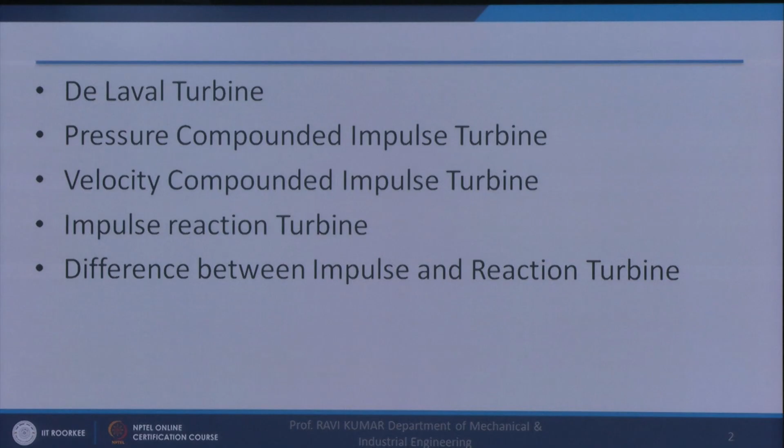So first of all, we will discuss the single stage De Laval turbine. This is a single stage turbine. So there is a shaft in this turbine, and on this shaft the blades are fixed.

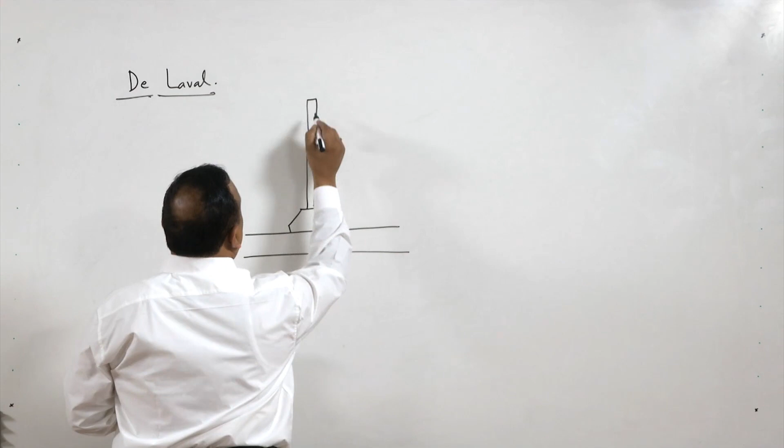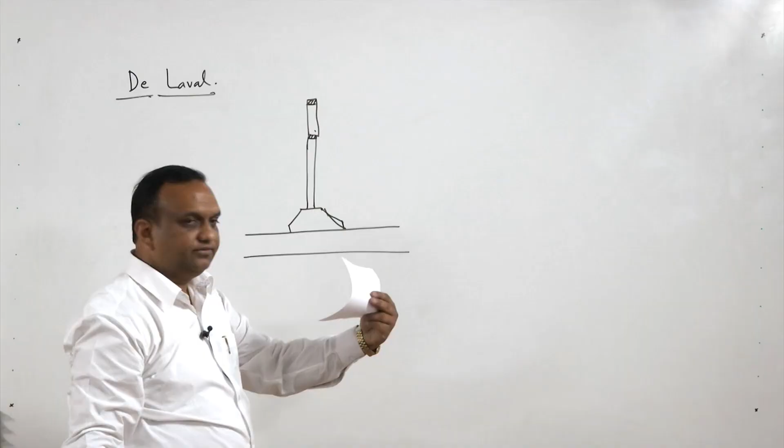So there is only one row of the blades. It is going to be like this, and this appears to be rectangle, but it is a curved plate or a curved blade like this. So when we take the elevation of this, it will appear to be a flat plate, right?

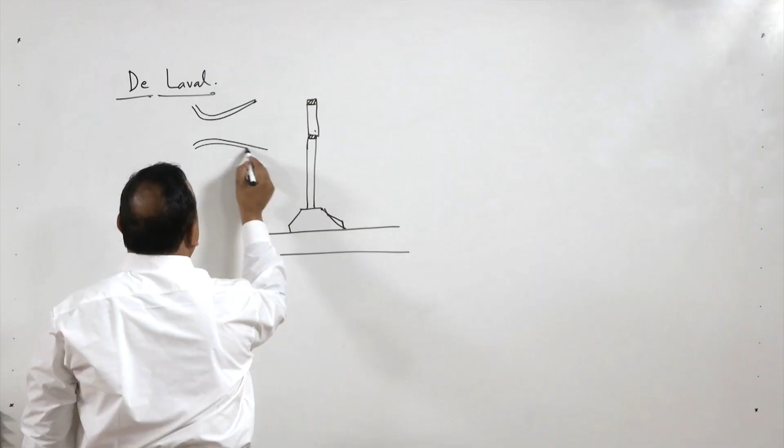And preceding the blade, there is a nozzle. Normally, it is a converging diverging nozzle. Now this nozzle sends steam to the blade. So this is a nozzle, converging diverging nozzle, right?

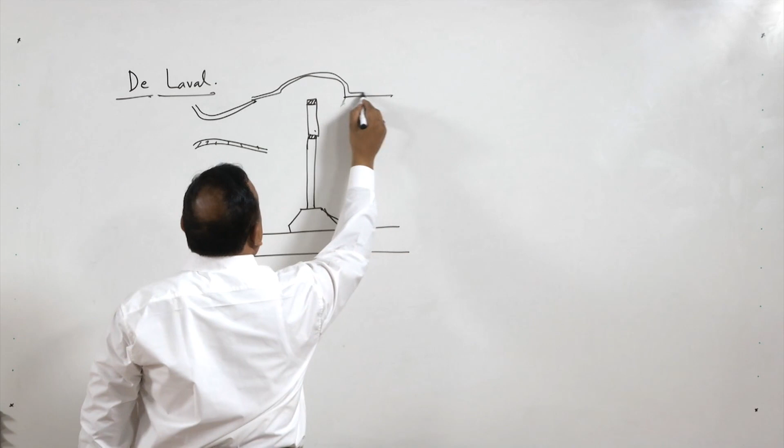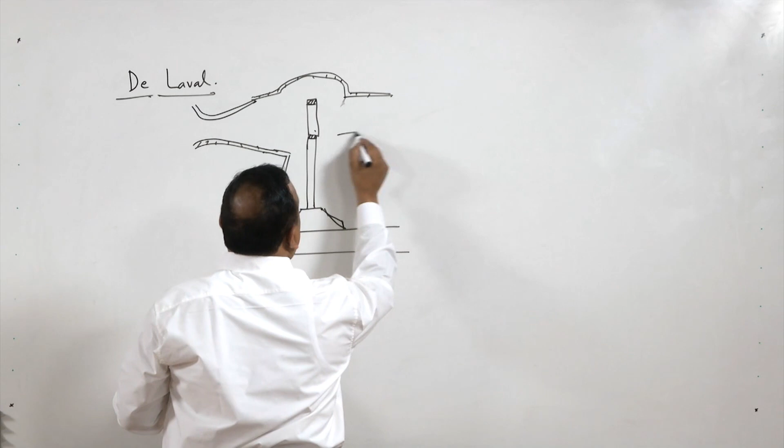And let us house this, and this is exhaust. And from this side also it is closed. This side also it is closed.

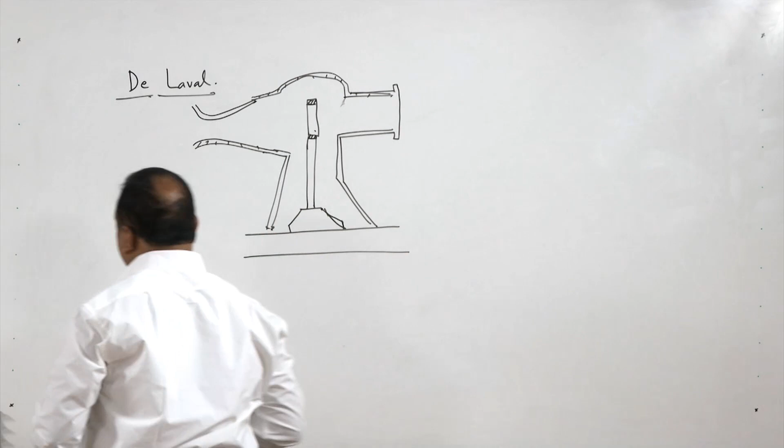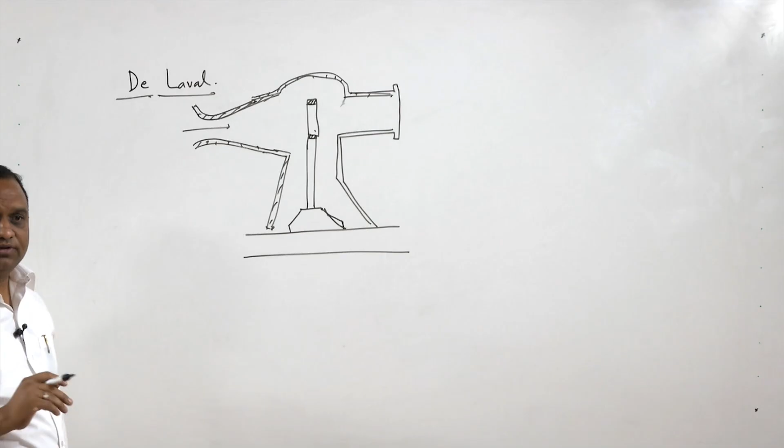Now this is converging diverging nozzle. As we know, in a converging diverging nozzle, the velocity of steam coming out is quite large, and normally it exceeds 1000 meter per second, and normally in De Laval type of turbine it is 1100 meters per second, right?

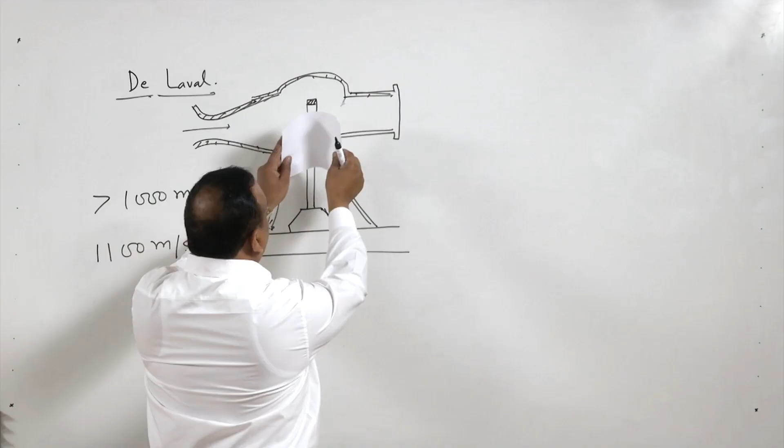And this steam glides over the blade, and the blade, if the shaft is along the board, is like this, and when it glides over the blade, it exerts force on the blade, and a tangential force is exerted on the shaft with the result rotational motion, because there are number of blades.

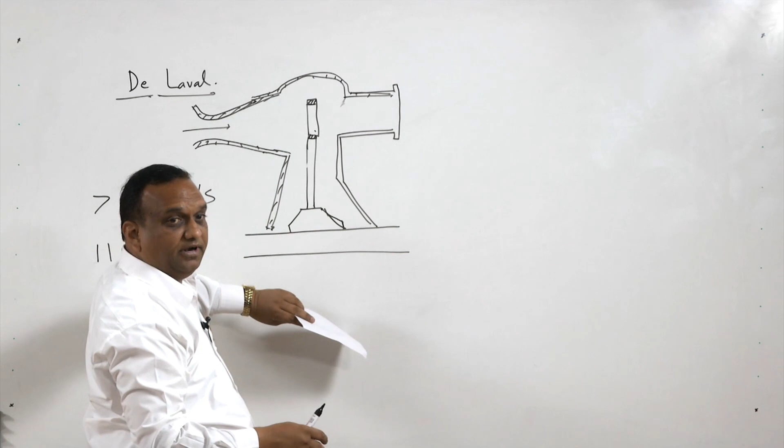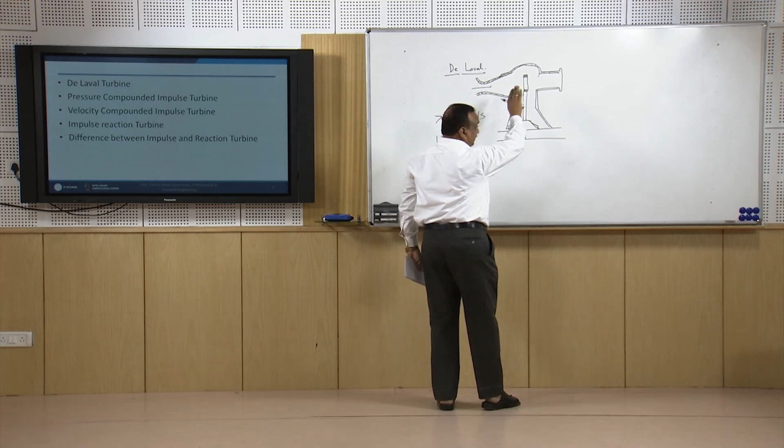There is series of blades circumferentially and axially. But this is a single stage turbine, so there is only one row of blades. Circumferentially there are number of blades, but axially there is only one row of blade in De Laval turbine.

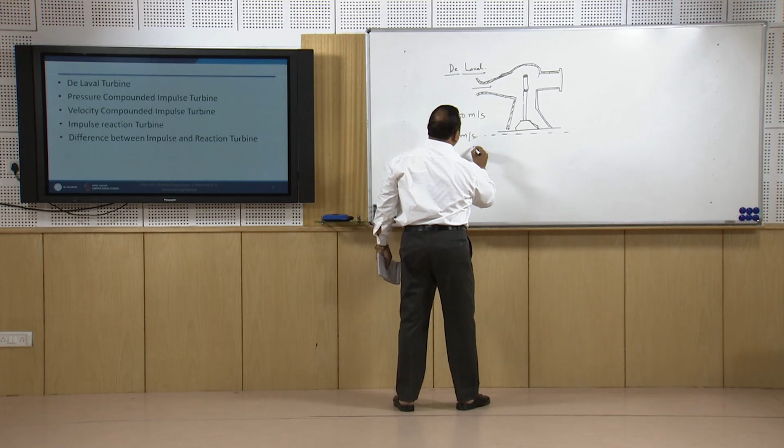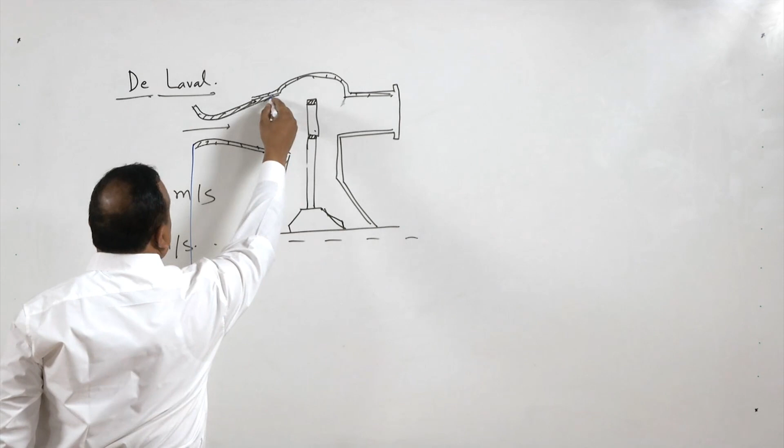And if you look at the variation of velocity and pressure in this turbine, let us make this half shaft, pressure and velocity variation. We'll draw this is nozzle, blades.

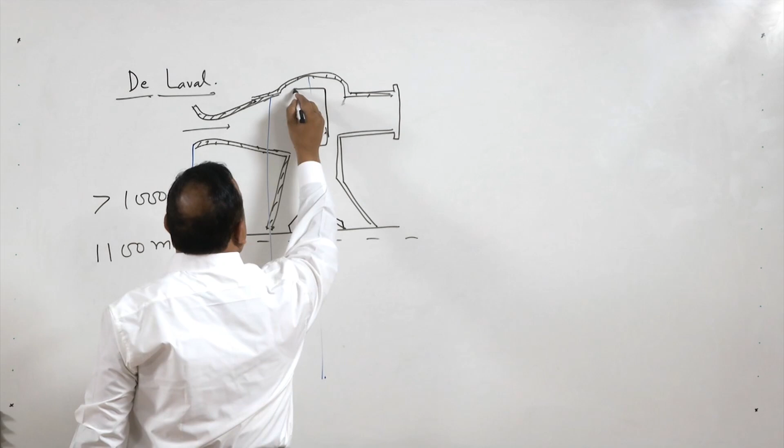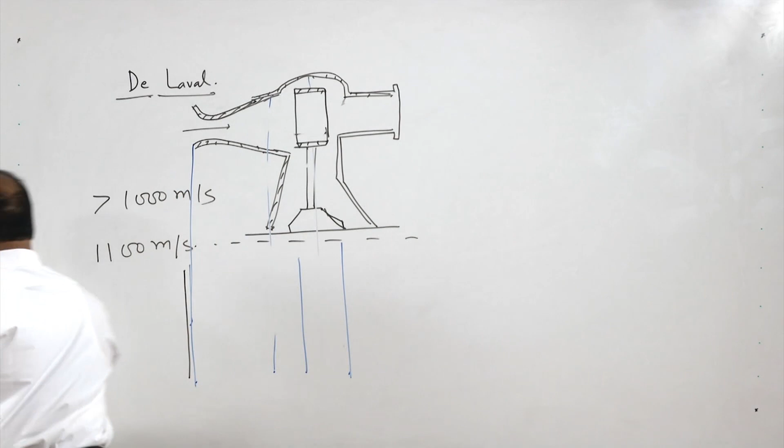And there is a recess between nozzles and the blades. This is the line, this is the gap for nozzle and this is for blade. So if you look at the variation of pressure, there is a variation in the pressure in the nozzle right from the entry to the exit, from entry to exit there is a pressure drop in the nozzle.

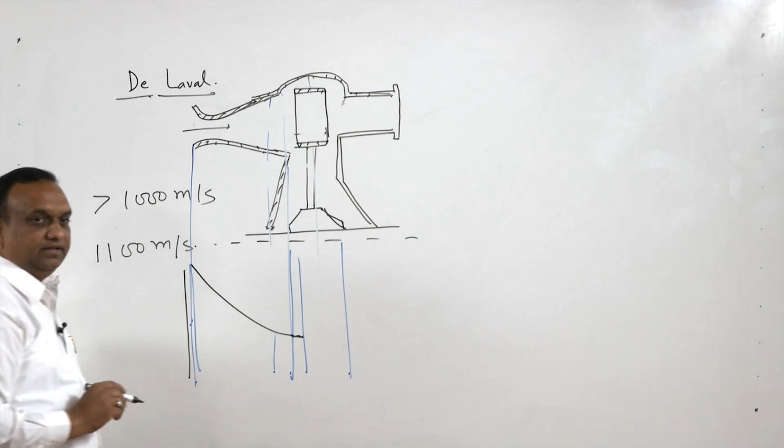In these we do not consider any pressure or velocity loss, so it goes on like this. And what about pressure loss in the impulse turbine blade? Pressure loss in the impulse turbine blade is 0, there is no pressure drop in impulse turbine blade, so it is also going to be straight.

And this is going to be the condenser pressure. This pressure is condenser pressure.

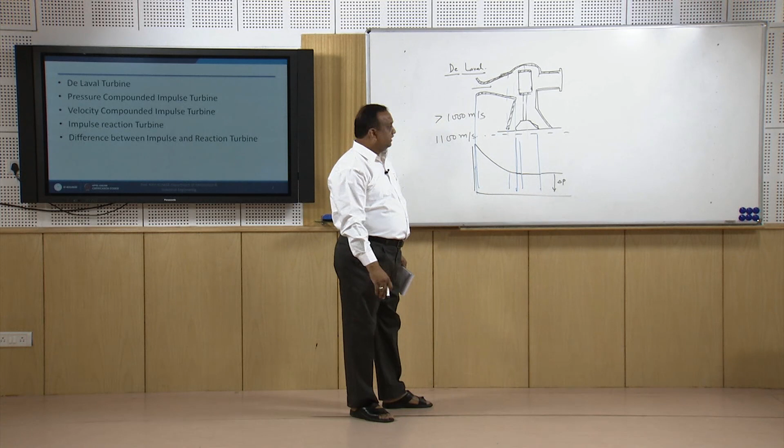Now regarding the velocity inside the turbine, the velocity also increases here, it increases in nozzle, velocity of steam, because nozzles are basically used to convert pressure energy into the kinetic energy. So velocity increases in the gap between the blade, because there is small gap between the nozzle and the blades, so it remains constant here, and in the blades the velocity keeps on reducing.

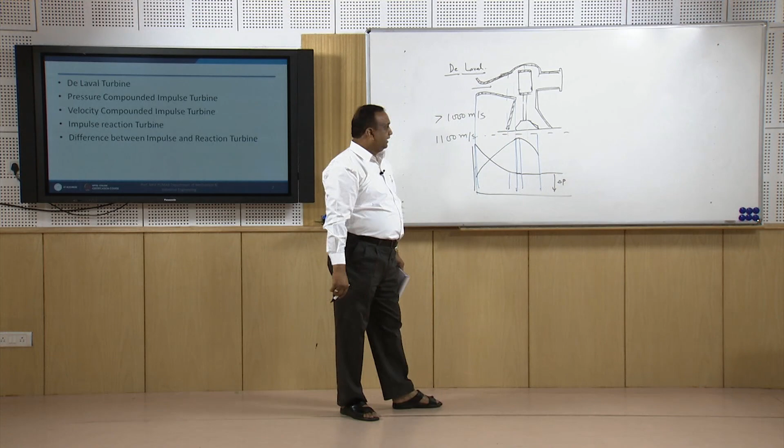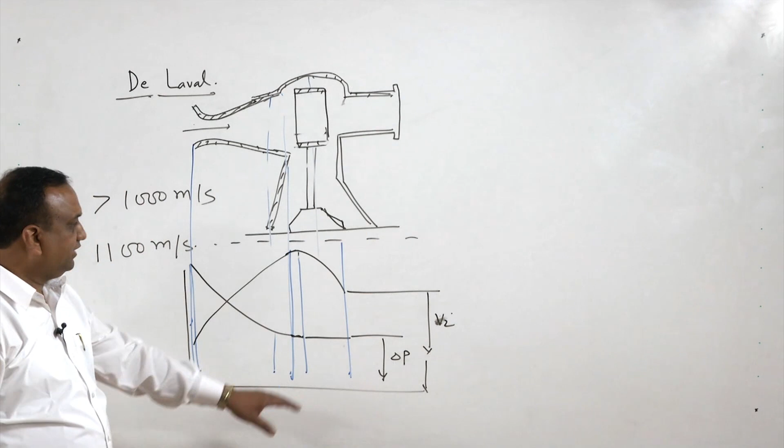And here exhaust takes place. This is almost this is V2, and in fact a lot of energy is going out with this velocity of steam. It is approximately 10 to 12%. That is the kinetic energy which is going out of this steam first of all.

So this is the wastage of energy. So it should be trapped in order to improve the efficiency of the turbine.

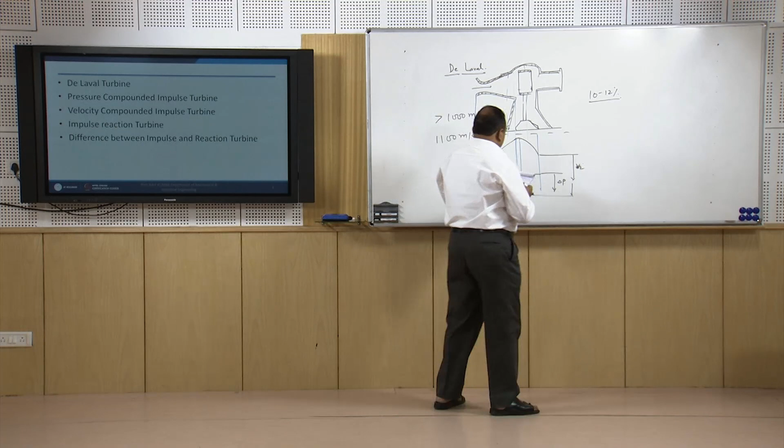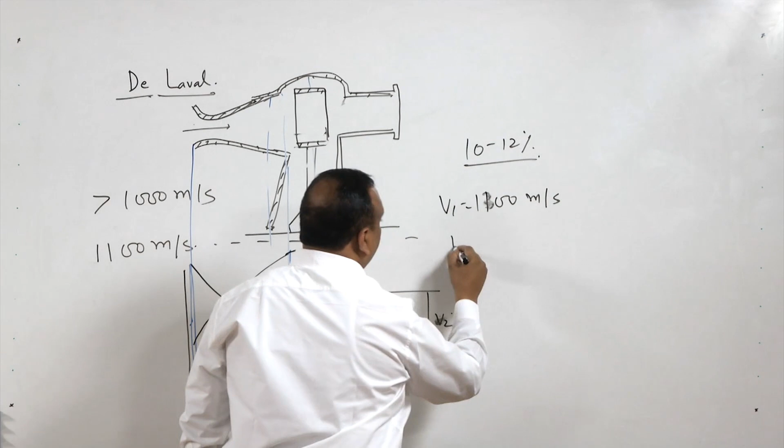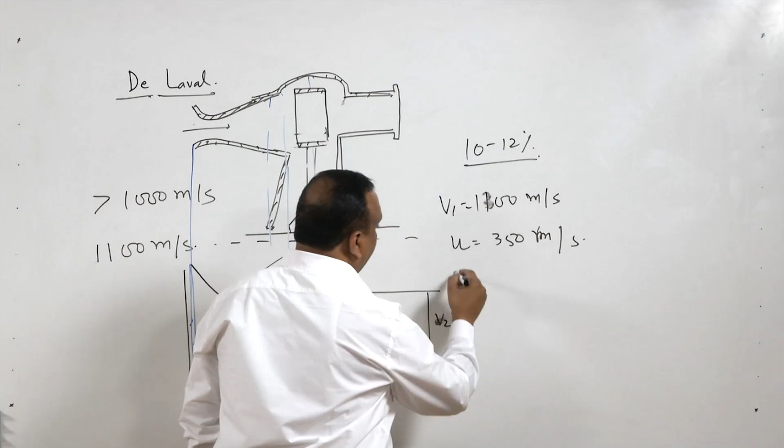Its inlet velocity is approximately 1100 meter per second, as I stated earlier also. The velocity U, the rotational velocity of a rotor, is approximately 350 meters per second, and N RPM is 3000, 30,000 RPM. So in De Laval turbine, single stage turbine, the RPM is 30,000.

RPM is 30,000. Inlet velocity is 1100 meters per second, and approximately 10 to 12% of the kinetic energy is going out with the exhaust. So these are the main drawbacks of this single stage De Laval turbine.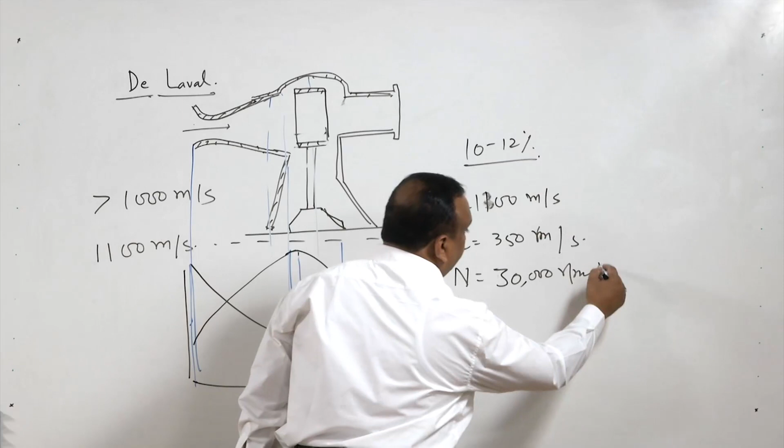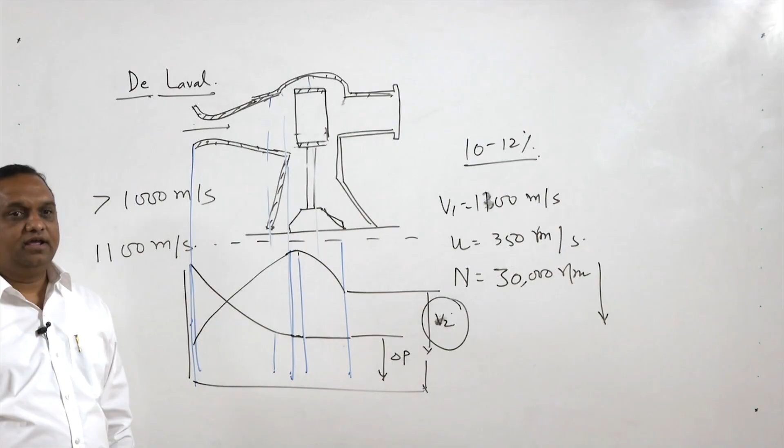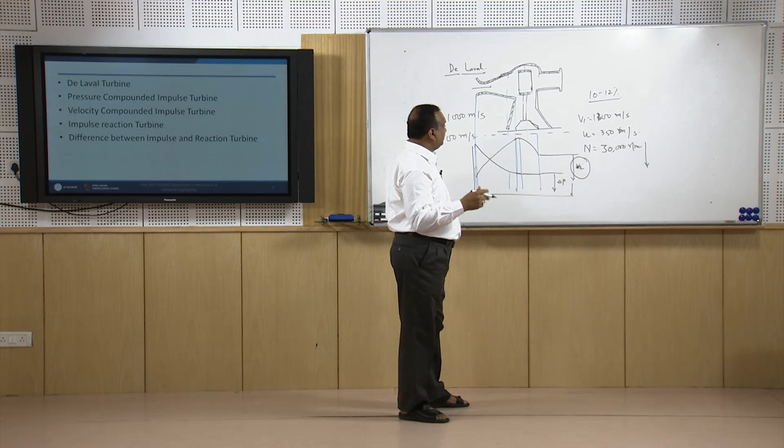Now in order to improve the working of this turbine, first of all we have to reduce the RPM to an acceptable value. Second, the losses due to the kinetic energy of steam leaving the turbine have to be minimized. For this purpose, compounding of the turbine is done. This turbine is used for smaller power generation, but through compounding we can reduce the RPM and we can reduce these losses also.

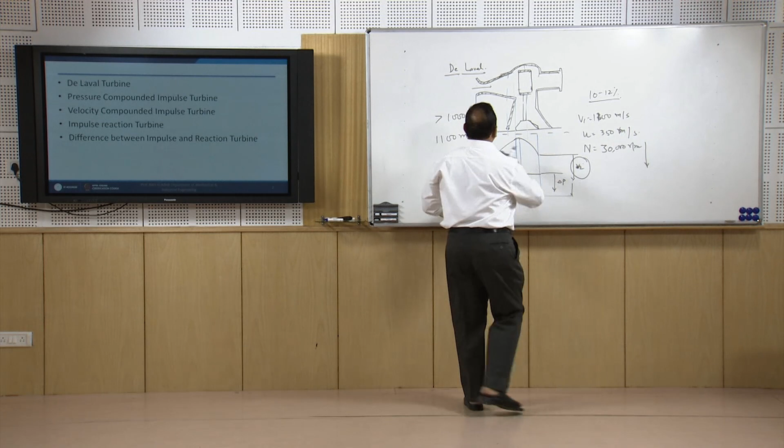So for the purpose of compounding, we will draw another diagram, and this compounded impulse turbine is also known as Rateau turbine.

In this turbine, the pressure drop does not take place in a single nozzle. There is a set, a combination of blades and nozzles. So one stage consists of one set of nozzles and blades, right. De Laval turbine was a single stage turbine.

So in the Rateau turbine there are a number of stages. If we depict them pictorially, the turbine is going to look like this.

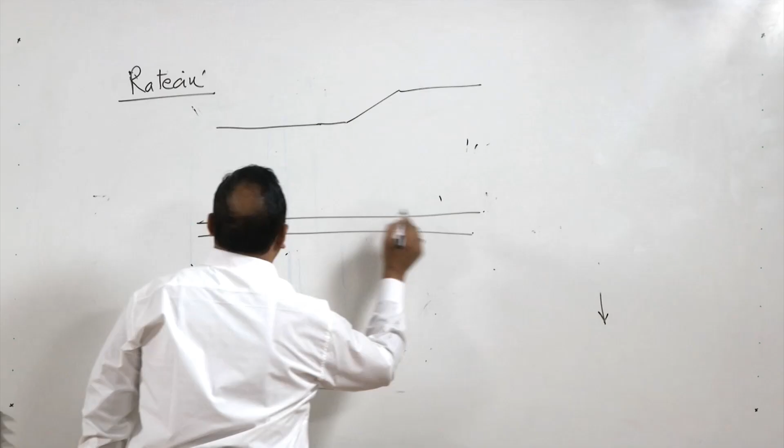There is a shaft. On the shaft there are blades. First of all we will depict the blades. There are blades, and there are nozzles.

And here also there are nozzles, another nozzle. Similarly, we can have n number of stages. Each stage will consist of a set of nozzles. There can be n number of nozzles circumferentially, but actually there is only one grid of nozzles and one grid of turbine blades. Similarly, we can have a number of stages.

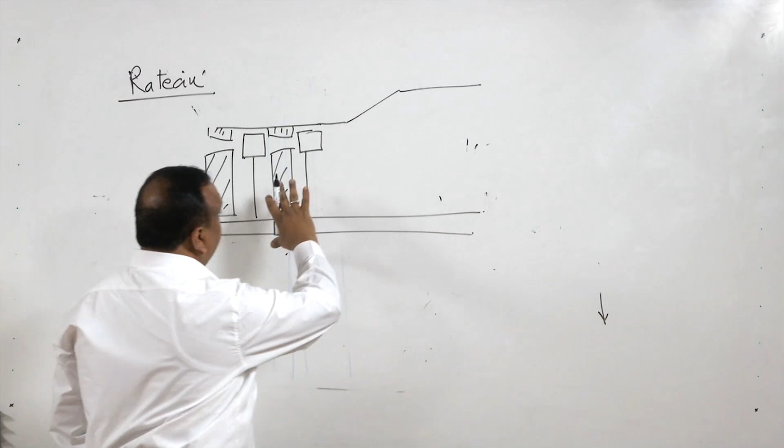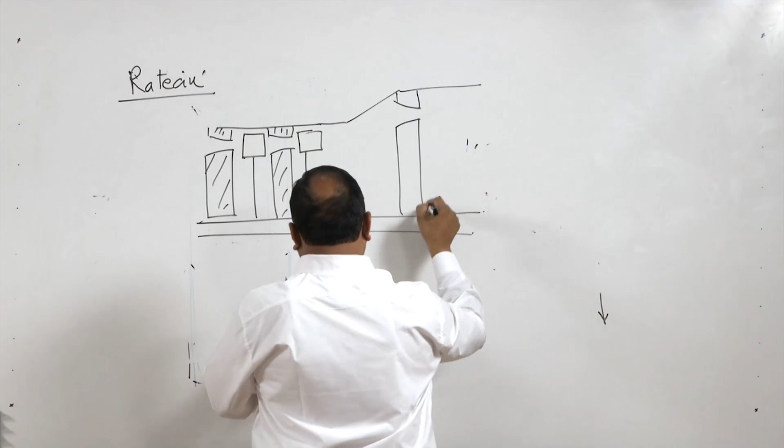When the pressure is reduced, the volume is increased, so the size of the turbine is also increased. We can have n number of stages here also.

Now these nozzles and blades are fixed to the shaft, and the blades rotate along with the shaft, but the nozzles do not rotate along with the shaft. In fact, there is a small gap between the nozzle body and the shaft, and at the top they are fixed with the casing. So they remain stationary; only the blades, which are fixed on the shaft, rotate with the shaft.

Now here, if we draw projections from the nozzles, these are the projections from the nozzle, then from the blade, this one and this one, then again from the nozzle, then again from the blade, and so on. Now in the nozzle, let us start with the pressure drop.

So pressure drop in the nozzle is going to be like this. It is not linear, but because the distance is small, it appears to be linear. Then in the blades, it remains constant, because we assume the gap is very small, much smaller than what is appearing here, so it remains constant.

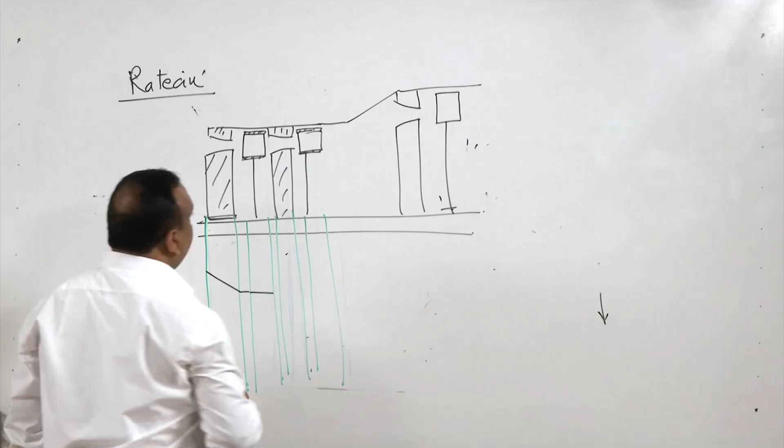And now in the blade itself there is no change in pressure, because it is an impulse turbine. After the blade there is a recess where there is no change in pressure. Then again there is a nozzle, there is a pressure drop, and then again the pressure remains constant.

So what happens here? The entire pressure drop does not take place in a single nozzle; it is split across a number of stages. Since the pressure drop is split in a number of stages, the steam entering the first stage of the blade will not have a very high velocity, like 1100 meters per second. It is going to be lower because the pressure drop is low.

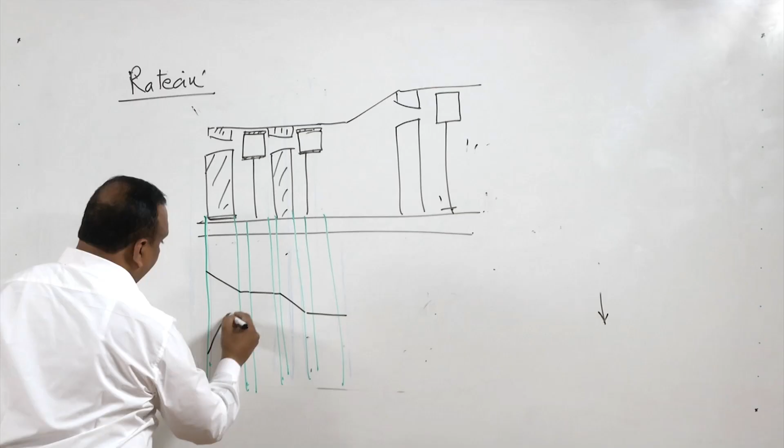And what about the velocity? Now we'll start with the velocity. In the first set of nozzles, the velocity will increase because there is a drop in pressure, so velocity will rise.

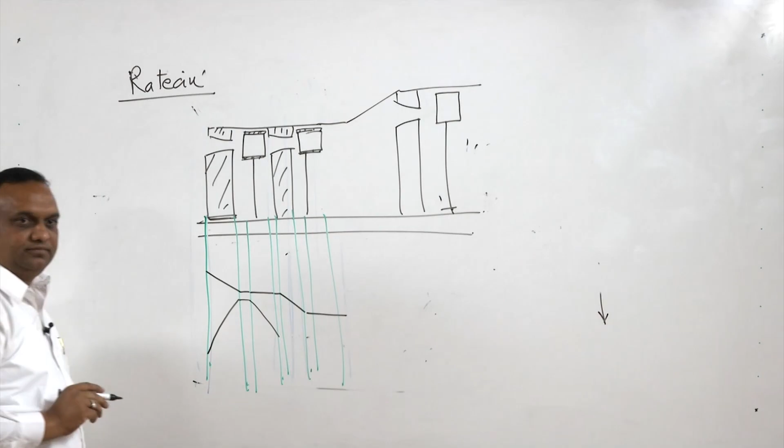In recess, the velocity will remain constant. Then in the blades, the velocity will fall. Then again it will remain constant in the recess space, then again in the nozzle it will rise, remain constant, and then it will fall. So velocity will keep on rising and falling.

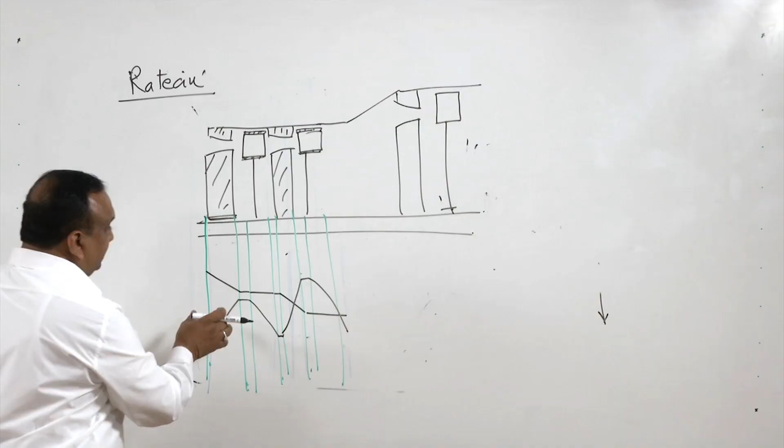Pressure is simply split into a number of stages. The net effect is the RPM of the turbine is reduced. Output is the same, but the RPM of the turbine is reduced, and this turbine becomes more useful for power generation.

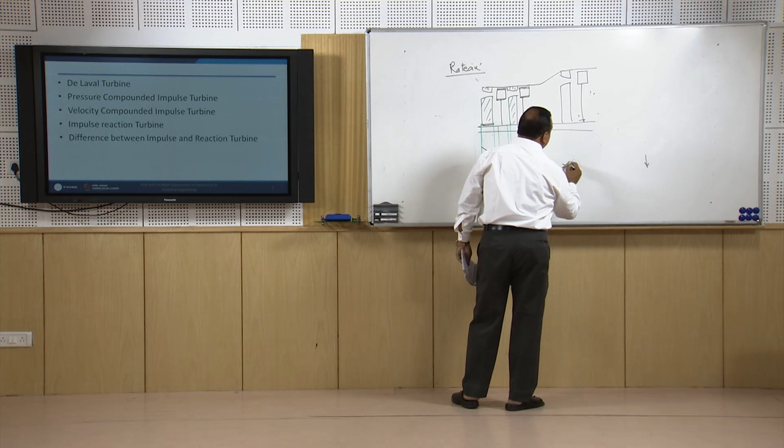Carryover losses mean losses of the kinetic energy being taken away by the steam which is leaving the turbine. These losses are only 1 to 2%, very less in comparison to the De Laval turbine. So this is the pressure compounding of turbine. Pressure compounding means pressure drop does not take place in a single stage, but it is split into a number of stages.

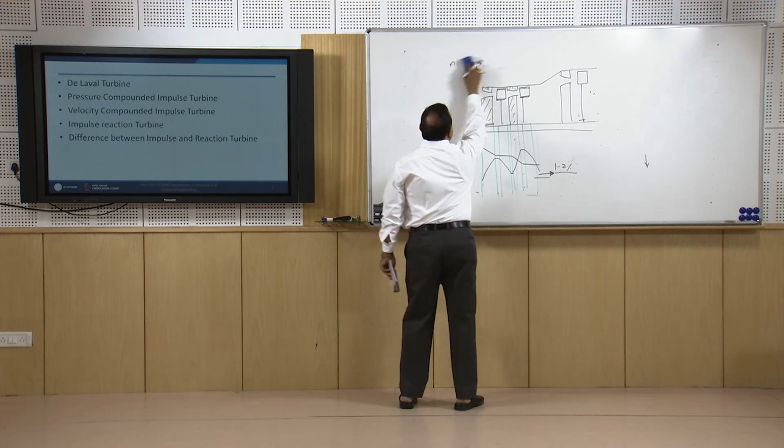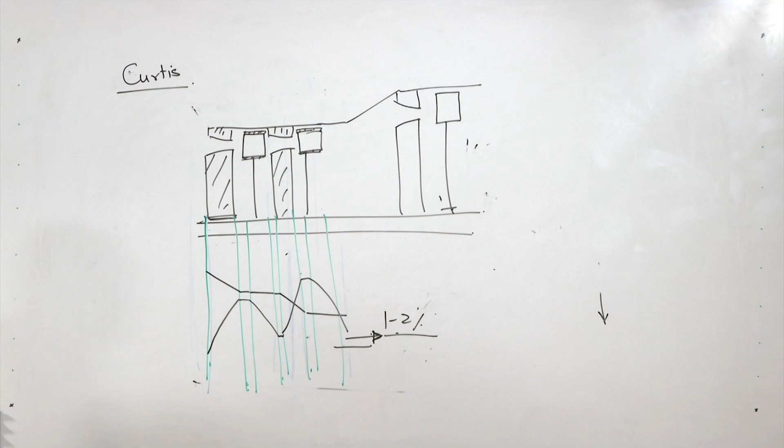Now another type is the velocity compounded turbine. The velocity compounded turbine is the Curtis turbine. So the Curtis turbine is a velocity compounded turbine. In this turbine, the velocity is split, pressure is not split.

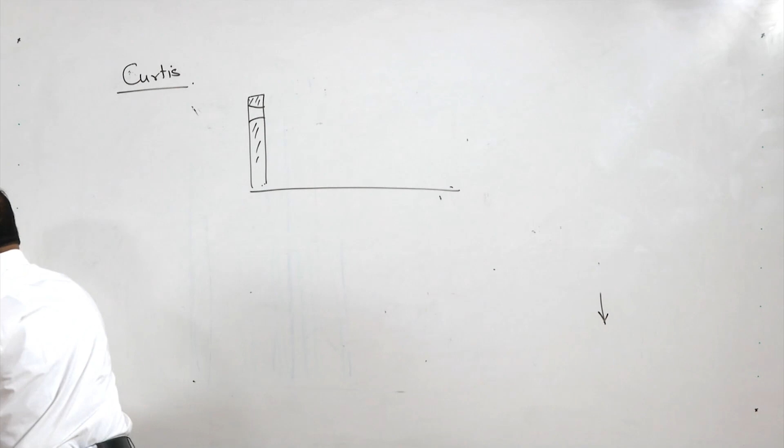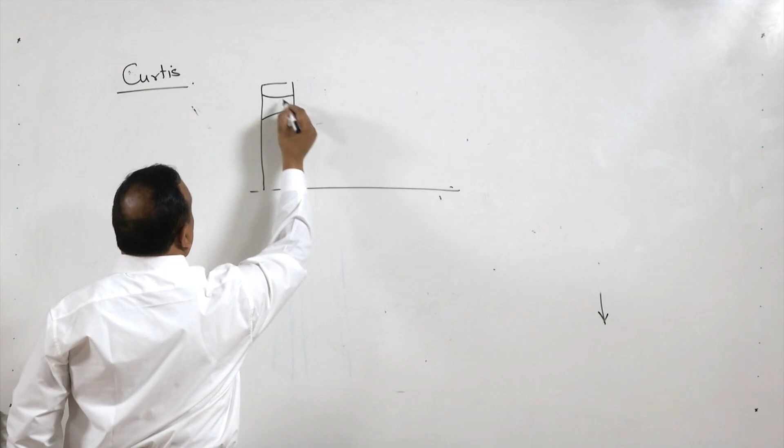In a pressure compounding turbine, the pressure is split. So in a velocity compounded turbine, there is only one nozzle on the shaft. Let me make it bigger, otherwise it will create confusion. There is a shaft and there is only one nozzle, and this is a diverging passage because the specific volume of steam is increasing.

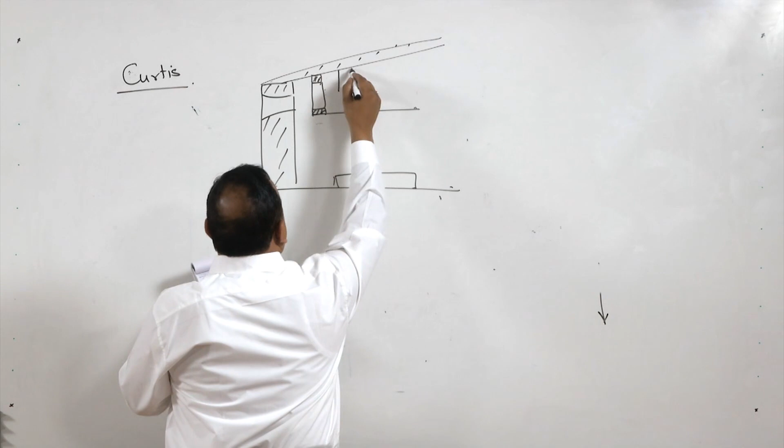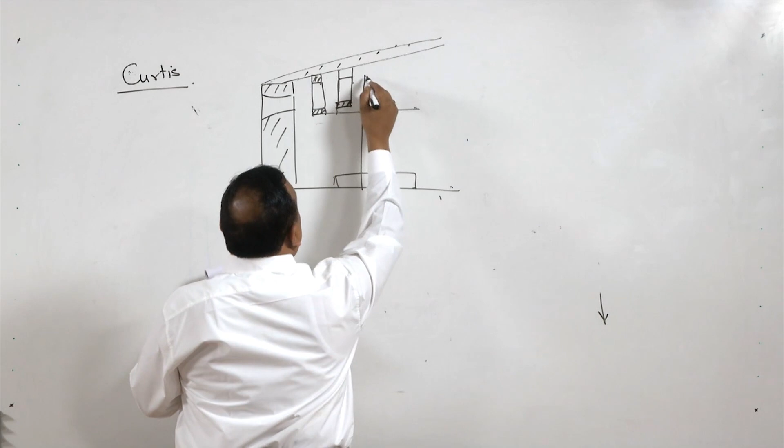So it is a diverging passage, and in this diverging passage we have blades fixed on the rotor. There are two types of blades here: moving blades and fixed blades. Moving blades are fixed with the rotor, and fixed blades are fixed in the housing. So there is another fixed blade.

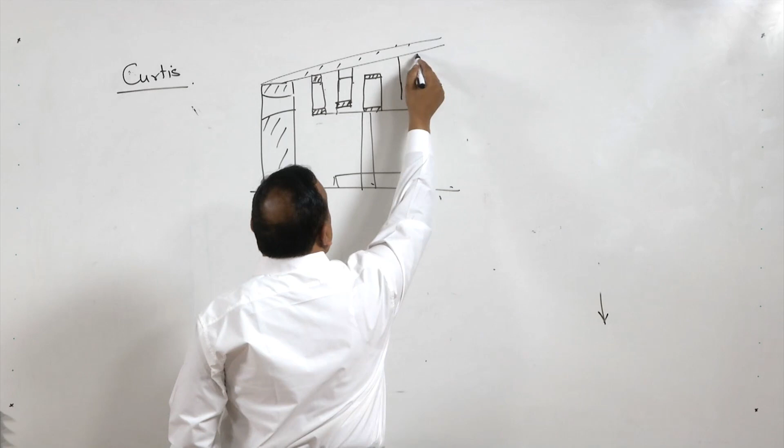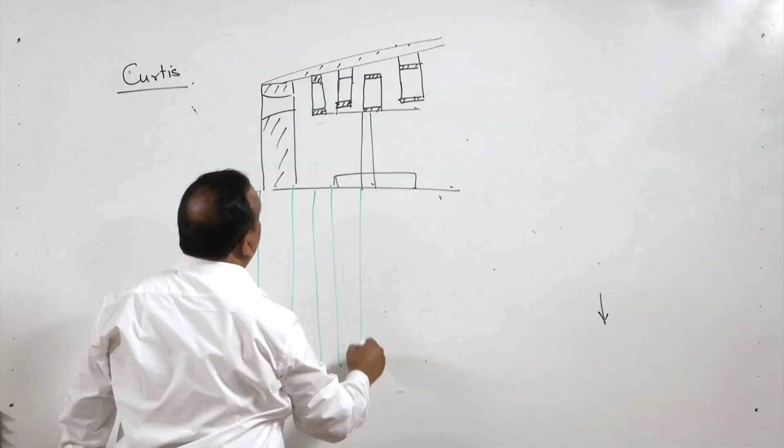Now I will tell you the purpose of having moving blades and fixed blades. So then there are again, we will draw the projections from here: nozzle, then moving blade, fixed blade, moving blade, fixed blade.

So there is only one nozzle here, and in this nozzle, as in case of other nozzles, there is a pressure drop and a rise in velocity of the steam. Pressure drop takes place only at this stage, only in the Curtis turbine. In the remaining stages, there is no pressure drop.

So pressure remains constant after the pressure drop, or we can swap them for the sake of convenience. So this is the pressure drop, and the pressure remains the same in the remaining stages in the Curtis turbine.

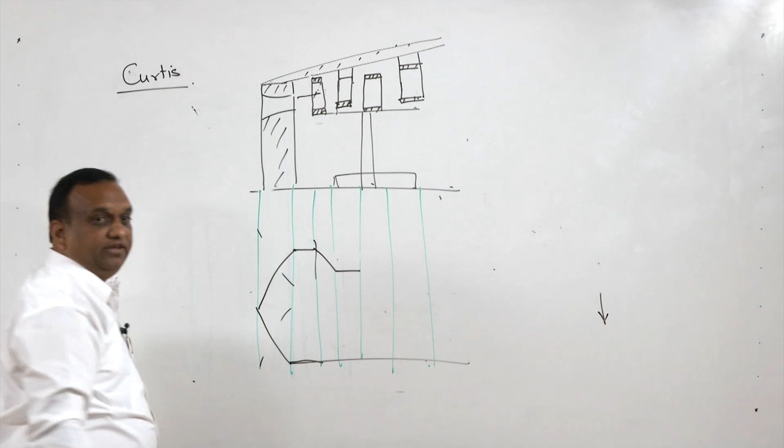Regarding the velocity, first there is a rise in velocity because the purpose of the nozzle is to increase the velocity, then there is a recess. So in the recess the velocity remains constant. Here there is a drop in the velocity at the guide blades, there is no change in the velocity, and then again there is a drop in the velocity, then at the guide vanes there is no drop in the velocity.

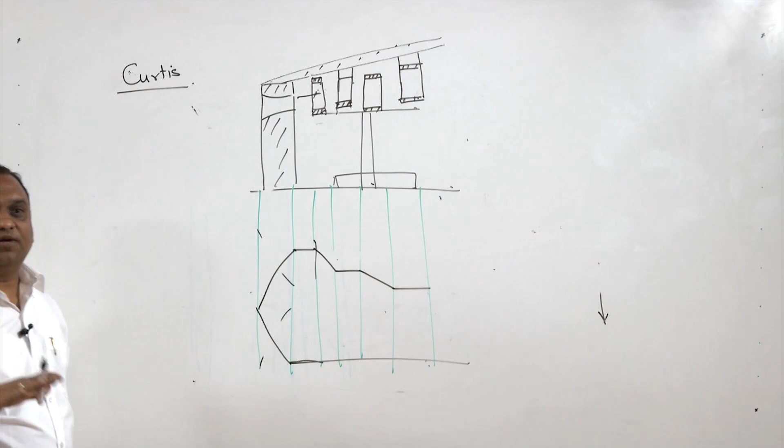So in a velocity compounded turbine we can have another blade here, so then again there is going to be a drop in the velocity. So in the velocity compounded turbine, the entire velocity is split into several stages, that is why it is known as velocity compounded turbine. And the previous turbine, the Rateau turbine, had the pressure split into a number of stages.

After this we will take up velocity and pressure compounding combined. We can have a combination of velocity compounding and pressure compounding. Certain stages are velocity compounded, and in between there is a pressure drop. So we can have another nozzle here, then velocity compounding, then another nozzle, velocity compounding. That type of arrangement is known as pressure and velocity compounding of impulse turbine.

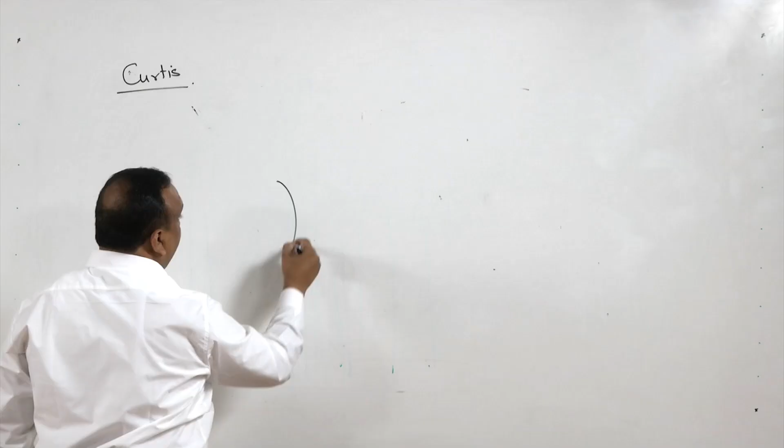Second type of turbine is impulse reaction turbine. In impulse reaction turbine, the output is generated not only by the impulse or rate of change of momentum of the steam, but also by expansion of steam or pressure drop of steam in the blade passage. Pressure drop of steam in the blade passage is not uniform, so expansion or pressure drop of steam also takes place in the blade passage, and the power is generated.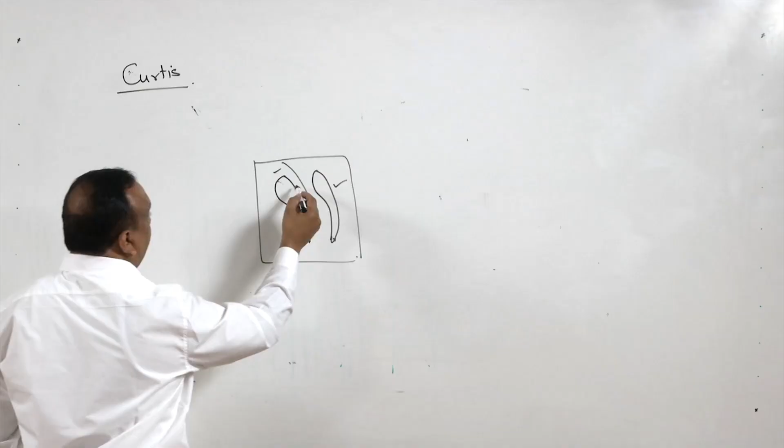For impulse reaction turbines, there are two types of blades, profile type and aerofoil type. Impulse reaction turbines have aerofoil type blades. We will discuss this impulse reaction turbine in details in subsequent lectures, but the shape of the blades is aerofoil type, and there is a change in the cross section area of the passage, and that is how the reaction is created in impulse reaction turbine.

So this turbine also has stationary blades and moving blades, since pressure drop takes place in both cases, stationary blades as well as moving blades. There is a special type of turbine known as Parsons turbine. In Parsons turbine, 50% enthalpy drop takes place in stationary blades, 50% enthalpy drop takes place in moving blades. So suppose there are 10 stages, in each stage it is 50% in moving and 50% in stationary blades.

This is how reaction turbines are compounded, because they do not have nozzles, they have only passages. One grid is for stationary, another is for moving. Pressure drop takes place in both the stages. We will discuss these impulse reaction turbines in subsequent lectures.

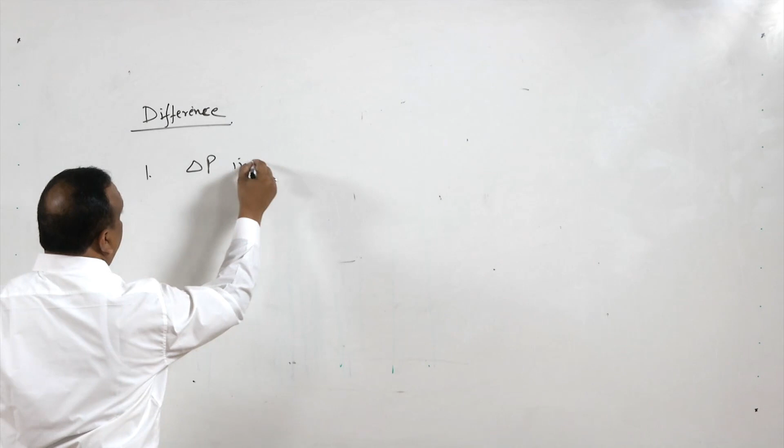Now, difference between impulse and reaction turbines. In impulse turbine, pressure drop is in the nozzle only. Impulse reaction turbines do not have any nozzle, and pressure drop takes place along the entire length of the turbine or along the axis of the turbine rotor.

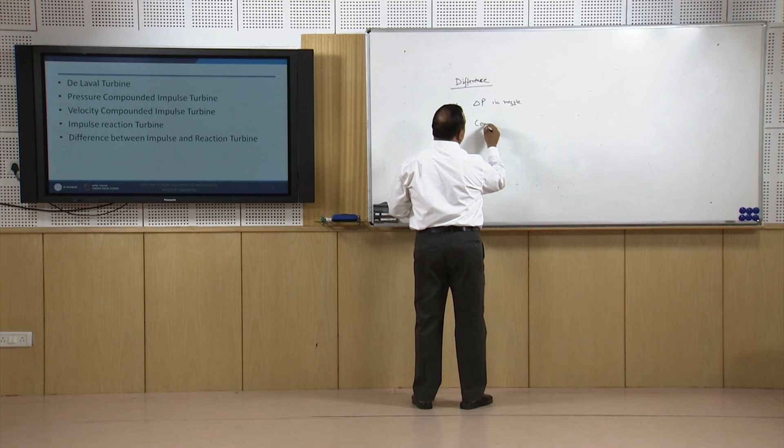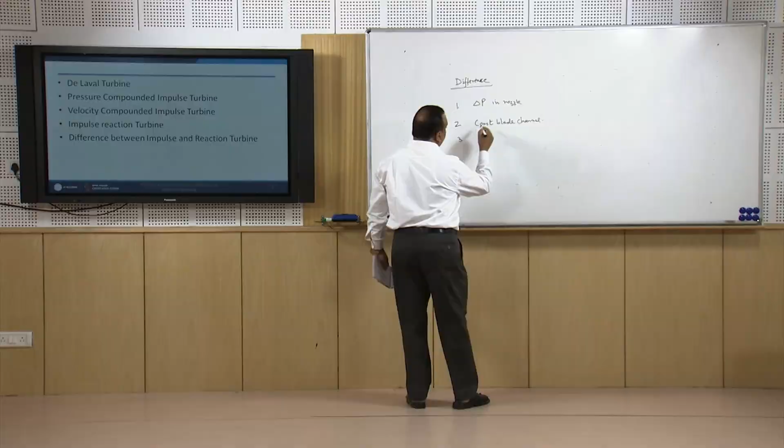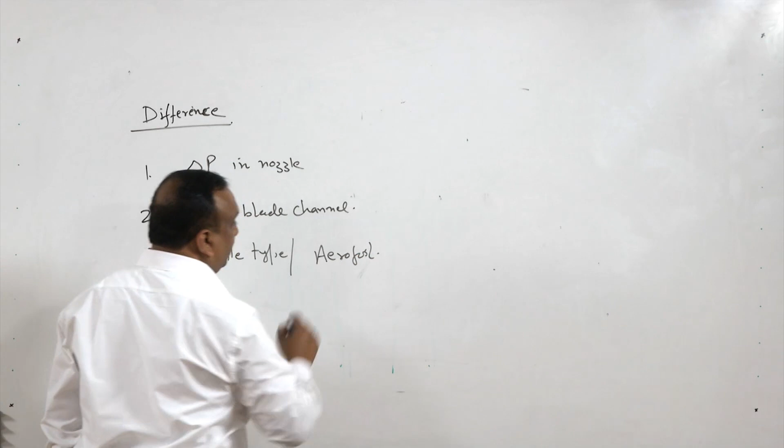In impulse turbine, there is a constant blade channel, so there is no pressure drop in impulse turbine. In reaction turbines, there is a variation in the cross section in the blade channel, that is why there is a pressure drop in a reaction turbine. Third, impulse turbine blades are profile type, and reaction turbine blades are aerofoil type, and this causes pressure drop in the channels in impulse reaction turbine.

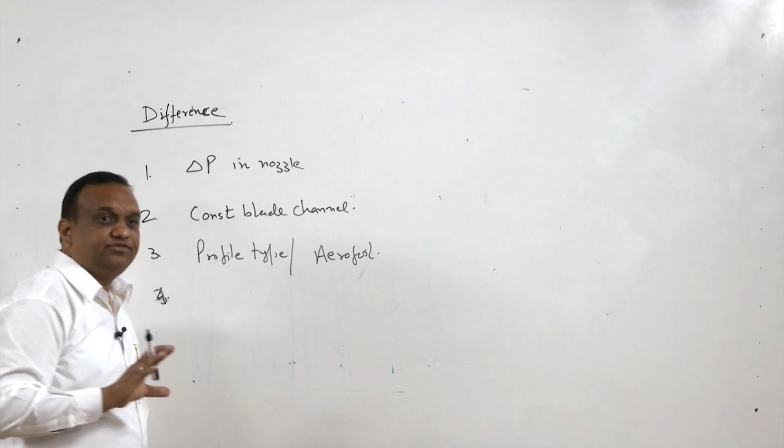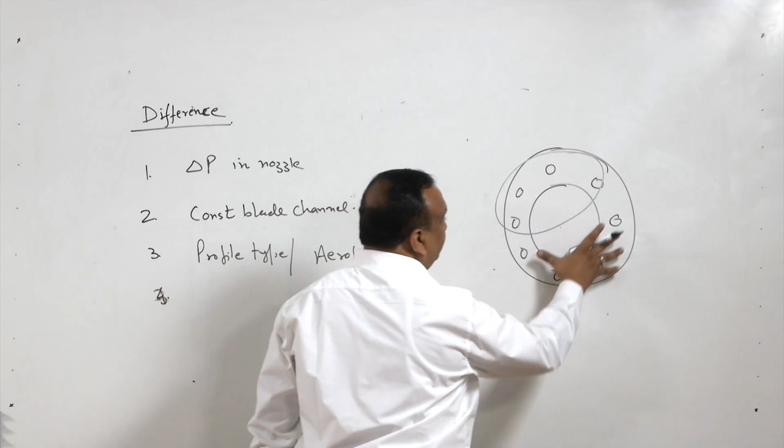Fourth, in impulse turbine we can have partial admission. For example, suppose there is a side view of the turbine, so we can have nozzles at different locations, and we can activate only some of these nozzles, not supplying steam to the others. So partial admission, for the sake of controlling the output of the turbine, is possible in impulse turbine, but this is not possible in impulse reaction turbine, because in impulse reaction turbine we do not use nozzles.

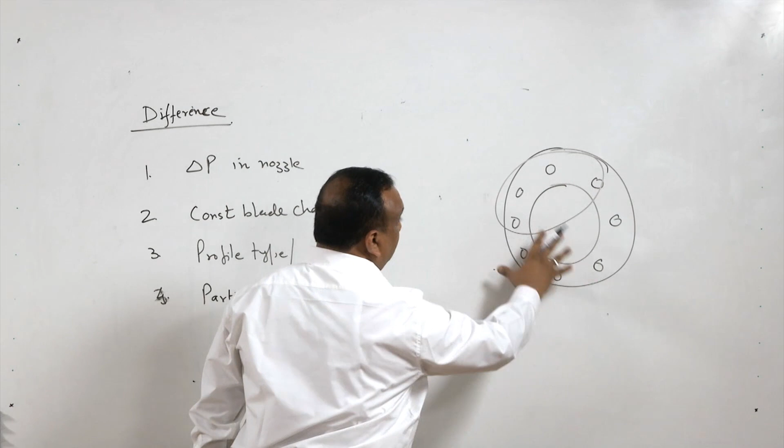Here there is a diaphragm consisting of the nozzles, a grid of nozzles, and we can partially supply steam to these nozzles, or select the number of nozzles to which steam can be supplied. So this is possible in impulse turbine.

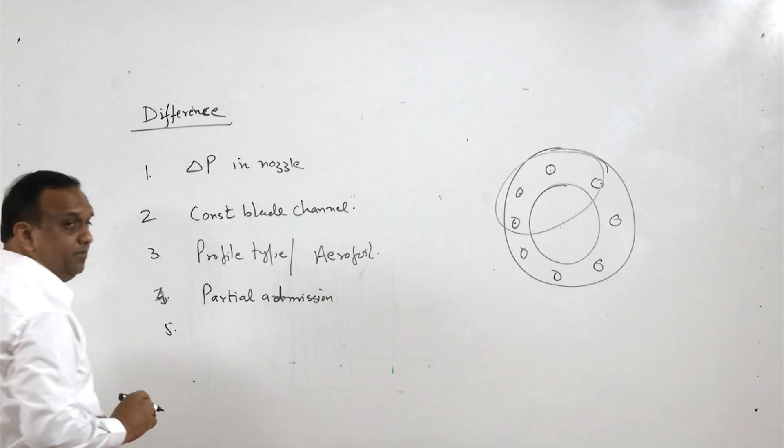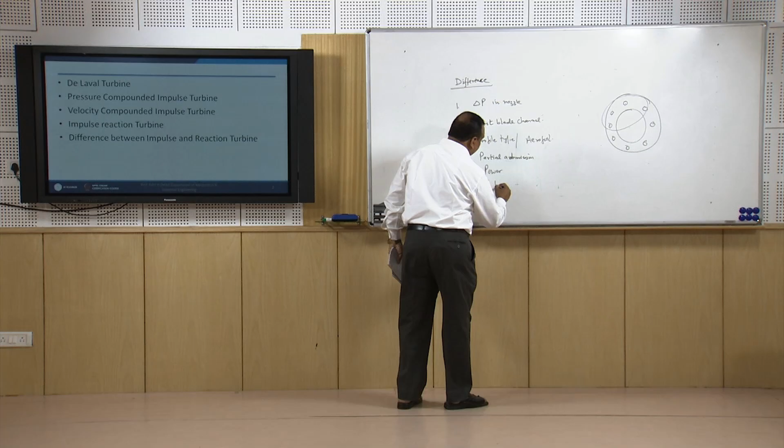Power developed in impulse reaction turbine is higher than the impulse turbine. If you look at the size, impulse turbines occupy less space compared with the impulse reaction turbine, but their efficiency is low. Efficiency of impulse turbine is less than the efficiency of an impulse reaction turbine, a bit less than the reaction turbine.

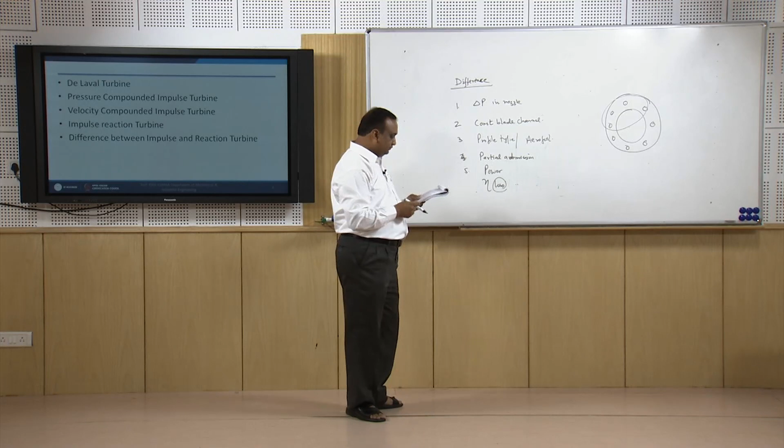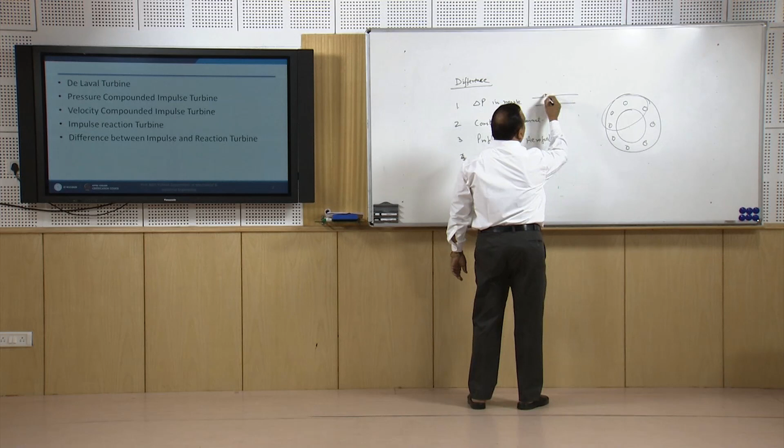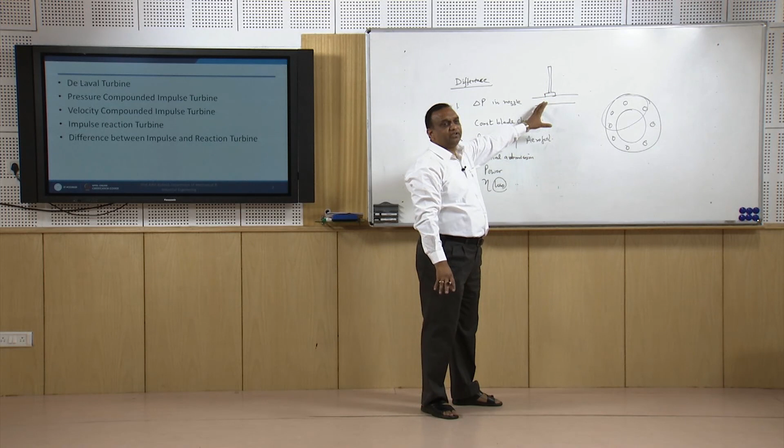These impulse turbines are used for low power generation, but the benefit of these turbines is their blades are easy to manufacture, they are lighter in weight, and they are fixed on the rotor, causing comparatively lesser stress on the rotor. So that is the benefit of impulse turbine compared with reaction turbine.

In the next class, with the next lecture, we will start with the analysis of power generation in impulse turbine.